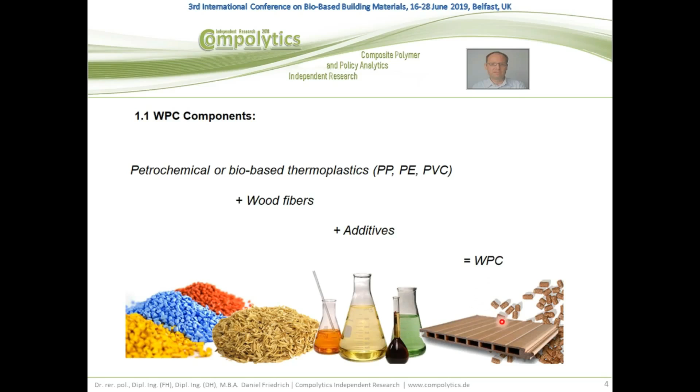So what are wood plastic composite materials about? They consist of a thermoplastic matrix made from fossil resources, in which wood fibers up to 80% are embedded. Then we need some additives for better bonding between these two components and also for improving particular properties. And then we receive such cladding profiles, which are called WPC cladding.

When comparing today's WPC with conventional plastics and maybe with future green composites, we can see that wood plastic composites are somehow an intermediate technology combining conventional fossil-based plastics, which are non-biodegradable, with future bio-based and biodegradable green composites. They still consist of a fossil-based plastics matrix, at least some 20%, but by replacing the plastic matrix with compostable pure biopolymers, we could receive green composites, which in the future make products completely bio-based and therefore also biodegradable.

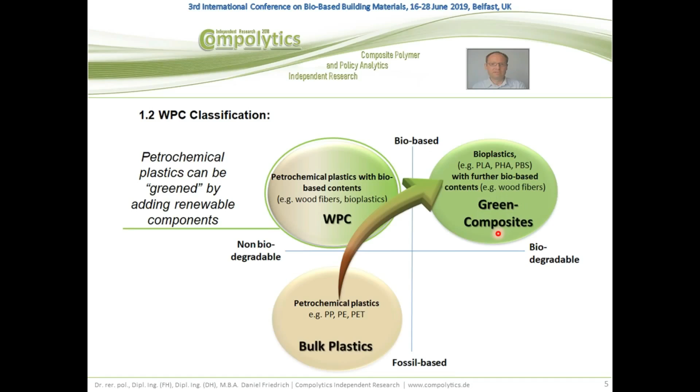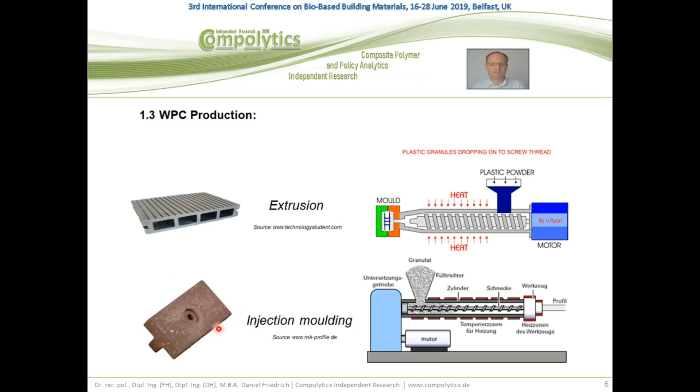So, having a closer look at the production technologies, we see that by extrusion technology we can further process the WPC compounds into such hollow or solid profiles, which are today usually applied in deckings and in facade claddings. But we can also apply injection molding, where we can also produce some special products like these connectors, which are used in decking, but also other products for daily use meanwhile.

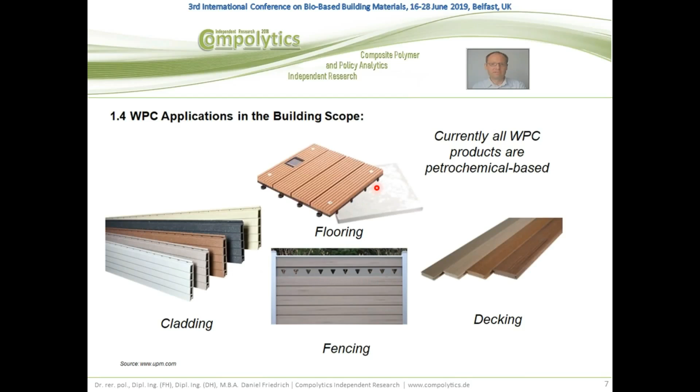So these are the typical applications today. Here are these solid profile deckings, also available as a hollow profile. Also these hollow core profile facade claddings. Also available are fencing profiles. They are all one-directional linearly extruded profiles, but by injection molding technology we can also receive such floor tiles meanwhile.

So we wondered about the long-term structural and physical performance of such cladding profiles in practice, and we conducted a one-year outdoor weathering trial where we tested 3 different compounds supplied by 3 manufacturers. Konsta is a manufacturer providing polypropylene-based profiles with pine fibers. Groja is another manufacturer and supplier in Germany with a PVC-based WPC with 40% content of polymer where bamboo fibers are embedded, and Fiberon is a supplier where polyethylene is used with 30% content and maple fibers up to 70%.

We created these samples, all the same size but varying in the thickness only, but we kept one side original from the manufacturer, which then was a non-brushed surface from Konsta, a brushed surface with the PVC matrix from Groja, and a co-extruded top plastics layer supplied by Fiberon. The rear side was planed so that we had even conditions between these three sample types.

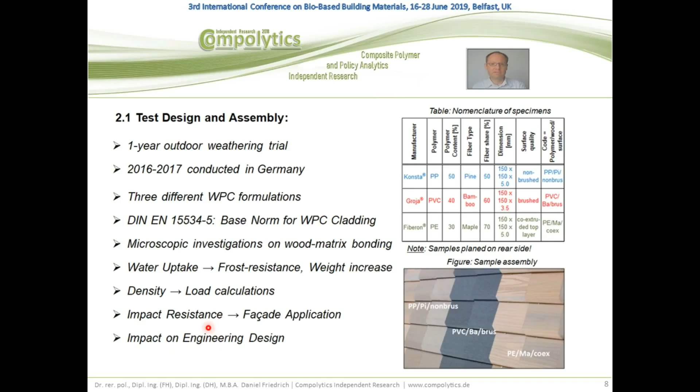They were installed and mounted on a test rack and exposed to the natural weathering on a roof in central Germany, and they were then subjected to such an outdoor weathering trial according to the WPC base norm. Then we did some microscopic investigation about the surface change over this 1 year. We measured the water uptake and density as the physical properties, and in terms of mechanical properties we tested for impact resistance and also modulus of rupture to get more information about impacts on the engineering design.

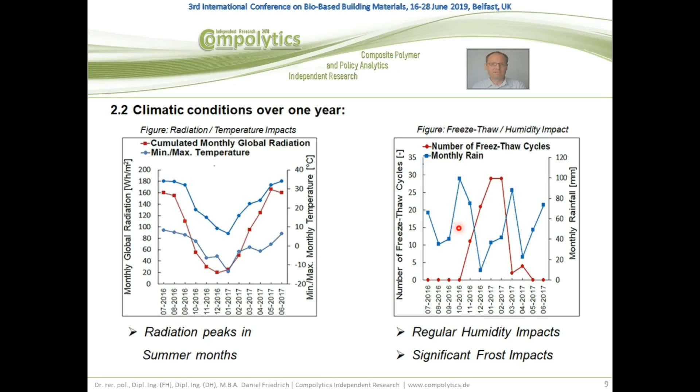This was the weathering condition over 1 year, with a change in the monthly global radiation. As can be seen, in the winter months this went down massively but had peaks in the summer months, and also the minimal and maximal temperatures varied over the year. In terms of the lowest and highest temperatures, we can see that we indeed had freeze-thaw cycles over the year, which occurred mainly in the winter months. The monthly rain also varied over the year but did not make a substantial difference between winter and summer months.

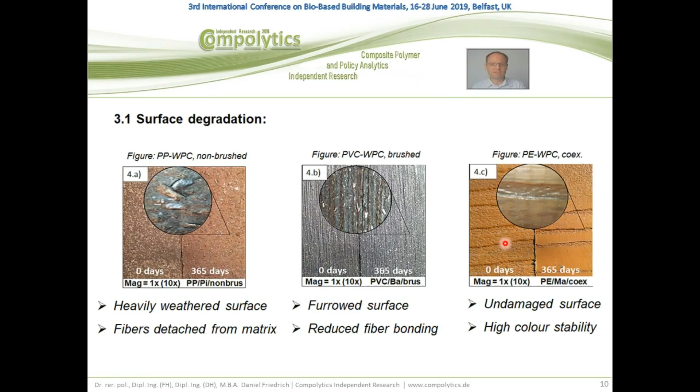After 1 year we did some microscopy investigation, and we can see that indeed the surface changed very much at the sample type where we had a non-brushed surface; we had detachment of the fibers from the surface, and the surface became very rough. With the second type, with the PVC matrix, we observed furrows and slight cracking in the surface and also fiber detachments, and the lowest change in surface quality we received with the sample with the co-extruded top layer, which protected the surface exposed to natural weathering very much. So here we had the lowest change of all.

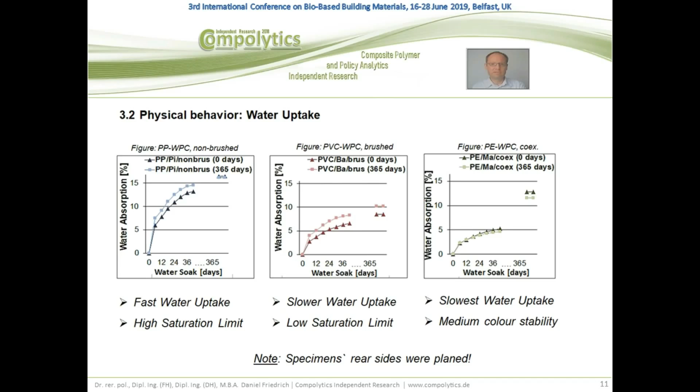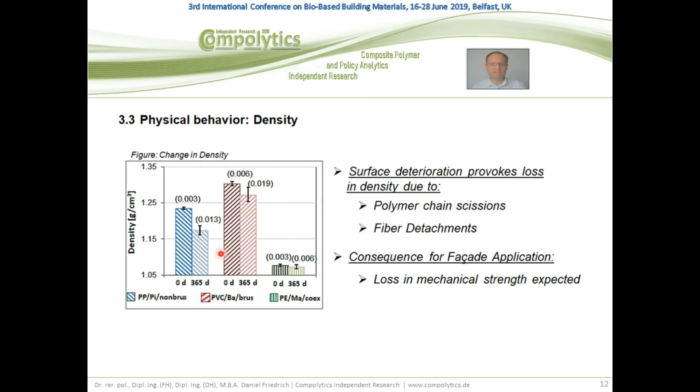Then we also measured density, and we can see a significant decline in density after 1 year, which is due to polymer chain scission and fiber detachments, which make the mass go down after 1 year.

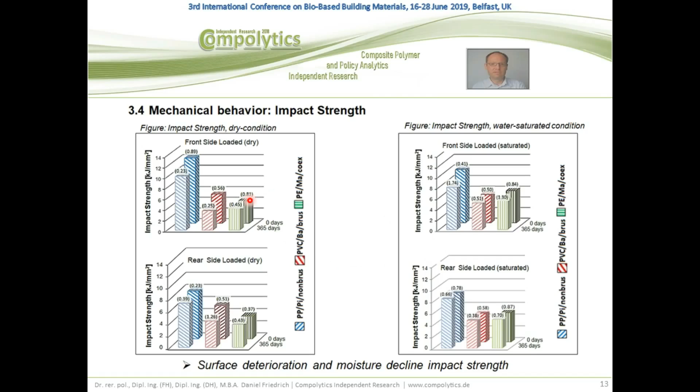In terms of mechanical behavior, we observed that we always received a lower impact strength for all three sample types, but the highest losses were measured for the first type with the polypropylene matrix, and the least decline we measured at the loaded front side, which was also exposed to the natural weathering, for the third type with the co-extruded top layer. But as can be seen, we overall receive declines in impact strength, which is an important factor for facade applications, which are also exposed to mechanical impacts.

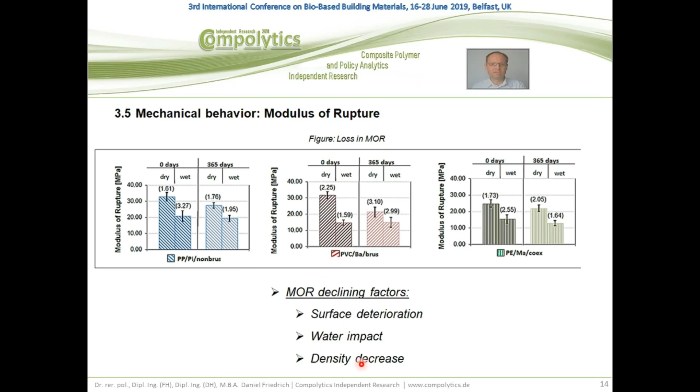The modulus of rupture also went down. There were nearly no differences between the three samples, so all three WPC types significantly reduced their modulus of rupture after 1 year. This is also due to surface deterioration by fiber detachment and polymer chain scission by the UV radiation, but also by water which stayed in the compound, and the decrease in density also led to a significant loss in MOR.

So what we can summarize from this sampling with outdoor weathering impact: the WPC surface degrades under natural weathering, mostly due to UV radiation leading to polymer chain scission, also leading to water uptake, which is promoted by fiber detachment and by fissured surfaces with micro cracking. And we had a significant decline in density, and also impact strength and MOR as mechanical resistance values went down. A retarding factor we observed was a lower fiber content, which obviously led to lower degradation.

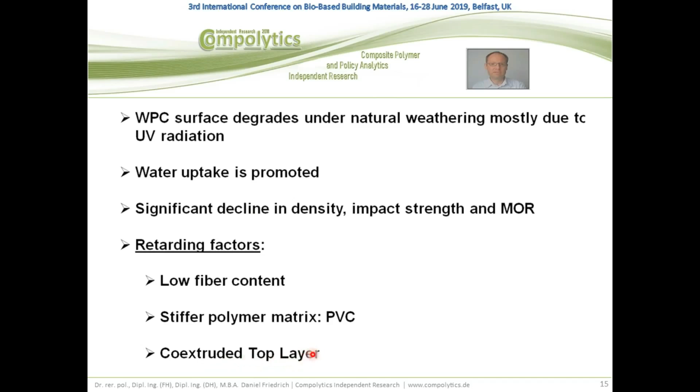A stiffer polymer matrix given by PVC also led to lower impacts from natural weathering and higher stability. And the co-extruded top layer is obviously an effective measure to retard the natural aging behavior of WPC in outdoor applications.